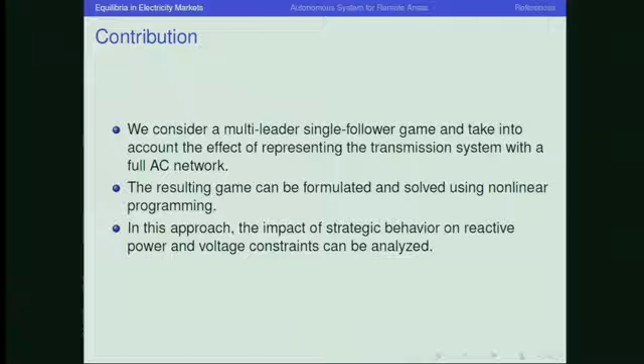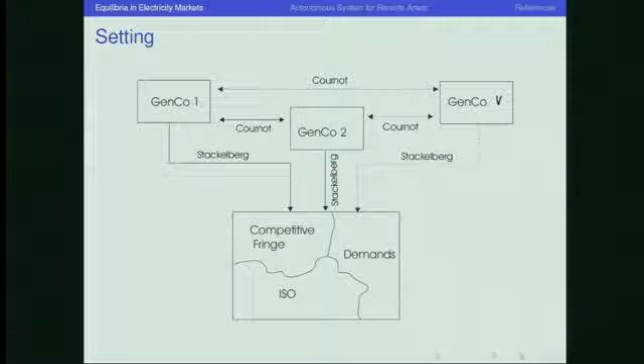Here's the idea of our market model. What we have here is a certain number of generating companies, or GenCos, that are competing against one another. But they are the ones that are deemed to be large enough that they have the potential to influence the market. So these are the guys that we want to keep an eye on from the point of view of the regulator, someone like the ISO. And then down here we have a follower. So these guys are the leaders of the game.

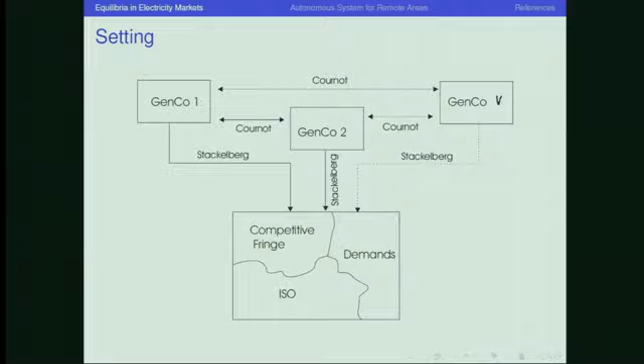And here we have a follower where we have the ISO that observes what's going on and clears the market. We have all the various demands in the market, which here are assumed to all be small enough that they won't actually game the market. And we have all the other suppliers that will simply take whatever price the market gives them. That's what we call the competitive fringe. So these guys we can basically all lump into one follower, and these large generators here are the ones whose decisions will impact the outcome.

I'm going to briefly show what the difference is between modeling with linear or nonlinear equations. So if we look at the DC approximation for the transmission system, we have a linear equation on the phase angles here. So theta is the unknown.

If we look at the detailed transmission system, we have two equations. We have this equation here, which is the detailed version of this one. So here we've basically said the cosine is small enough, and we approximate it with the angle. And the voltages are all approximately 1, so we simplify things and we get that. And then there's this other equation that completely disappears, which is the reactive power equation.

And we put some limits on the voltage. The price reacts to the demand. So if the price goes up, demand goes down. So we assume that the demand is price reactive. And we have some technical limitations on some reactive demand at every node for the stability of the system.

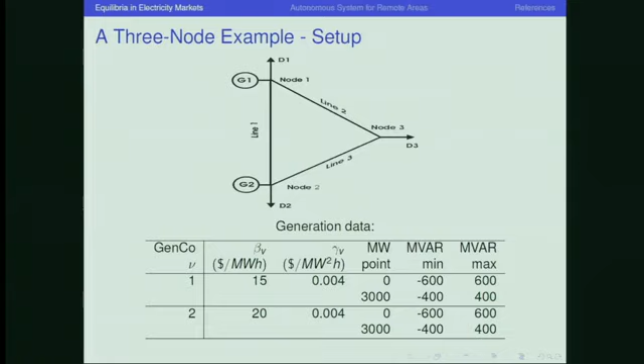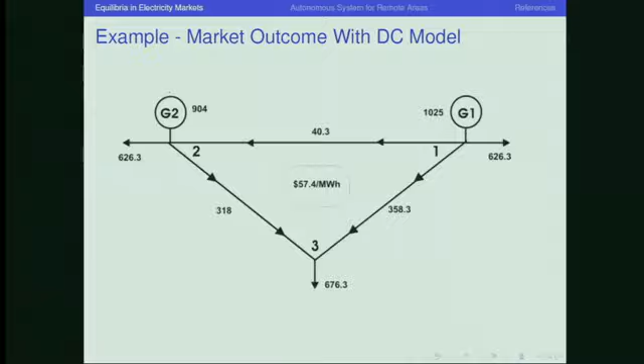And here's the outcome if I set up the large nonlinear optimization problem, which I didn't show because it takes a while to work through the whole problem. But we're basically looking at a bi-level optimization problem on that market. And here's the outcome if you solve the DC model. So we have generation amounts for G1 and G2. These are in megawatts.

And then we have power flows of 40 this way, 318 this way, and 358 this way. This is what's drawn by the demands of the 3 nodes. And one of the things you get with a DC model is that there's a single price for electricity for the whole network. And in this case, it's going to be $57 per megawatt hour for the energy.

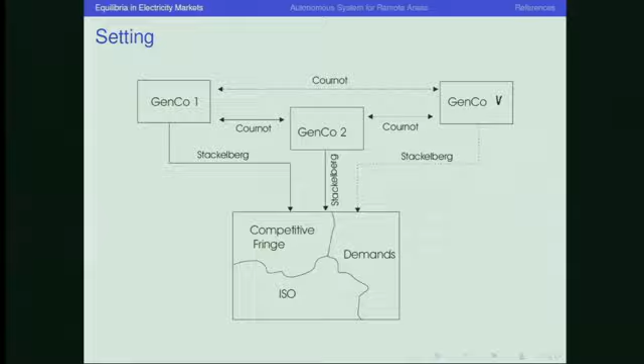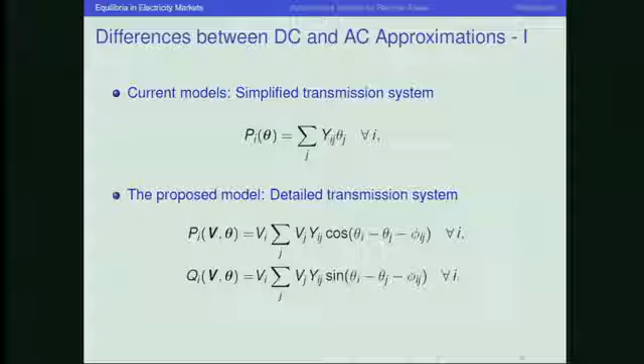So what I've done here is taken this problem and set up an optimization problem that says I want to maximize the profit for these guys, subject to having an equilibrium in the market with the followers here and their decisions as a leader. So it's a bi-level optimization problem. Write the optimality conditions. Make sure that the power flows all satisfy the simplified conditions at the top, this one, and this one. And you solve.

And then from the dual variables at each node, you get these prices. But in the linearized model, the dual variable is the same at every node. So you just get the same price no matter where you are in the network.

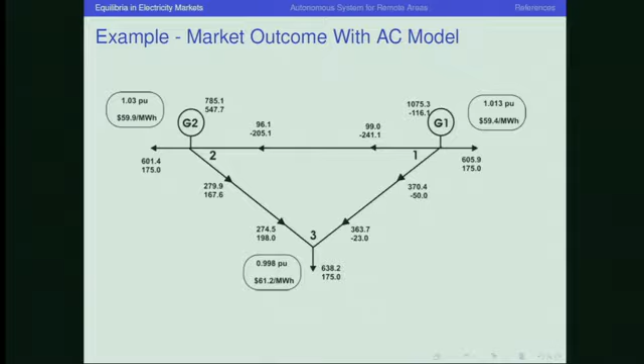Another aspect that also gets modeled is the losses. If you notice on each edge, instead of having a single number of megawatts, I actually have two numbers. I have active power on top and reactive power at the bottom, and there's a loss going from 1 to 2. So the amount injected is 99, but the amount that actually arrives at node 2 is 96. And this is much closer to the behavior of a real electricity network.

Another interesting aspect of this is that in the nonlinear model, in general, the equilibrium is not unique. So your market might land, instead of this solution, at this solution, where the prices have now changed. So here it's gone from 59 to 61. Here it's also gone up, and here it's also gone up. We still have the same general pattern that power is more expensive at node 3 than 1 or 2. But it is a different equilibrium that could be reached by the market.

And the power flows themselves are also going to be different. So for example, instead of having nearly 100 megawatts going from 1 to 2, I only have 67. And in fact, it's flowing from 2 to 1. So it's a very different solution in terms of that qualitative aspect of it. So the key difference really is how detailed do you make the description of the network, leaving all other assumptions the same for both the linear and the nonlinear model.

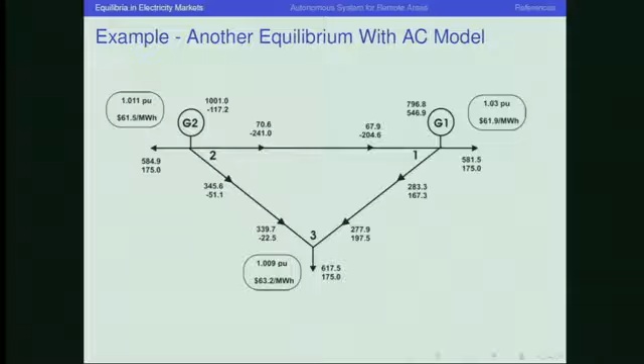One important point as well is that this approach is computationally effective. This is an example on 3 nodes. This runs fairly fast. But we have also run examples with much larger networks from the IEEE standard benchmarks for the purposes of publishing, and you can get these results in reasonable time. You can run a lot of simulations in a day to get a sense of what's going on. So this is computationally effective.

And then this can also be used for different kinds of equilibria. So the equilibrium that I discussed here, without getting into too much detail, is what's called a Nash equilibrium from what's called a Cournot-Stackelberg game. You can change the rules and apply the same principle to find different kinds of equilibria as well. So the point really is that it pays off to have the more complicated model for the network, and it can be solved using the tools that we now have from nonlinear optimization.

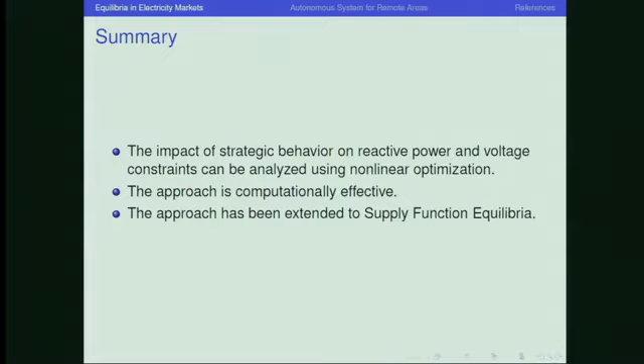Okay. So that's the first part that I wanted to mention. The second part that I want to mention is a different problem, which is the problem of designing a system to provide electricity in a remote area. Okay. And this is joint work, as I said, with our student Thibault Barbier and Gilles Savard from Polytechnique Montréal.

This is important in Quebec because we have a fair amount of activity that takes place in the north of the province. So we have the United States down here. North of the United States, there's a country called Canada. Within Canada, there's a province called Quebec, which is this red piece over here. And then far up in the north, of course, most of the population lives down here. Far up in the north, it looks like this. This is Newfoundland and Labrador here.

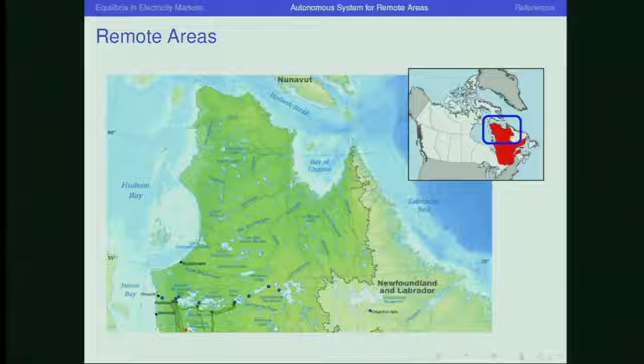And there's actually, for example, a mine at 62 degrees latitude, somewhere up here, called the Raglan mine, that exploits nickel. Okay. And if you wanted to connect the operations of the mine to the network, you'd have to draw a line from up here all the way to down where this water is. This is where there's a large chain of dams called the James Bay Complex that generates a very large amount of electricity. And that's nice, but it's a long way to go. So if you wanted to do this, it would get very expensive. And the idea is to have, of course, an autonomous system there to provide the power for the mine.

So the mine has an expected lifetime. So we want to plan what equipment do we place to provide the mine with power for this expected lifetime. Okay. Traditionally, what one would do is to put some generators, so there's some load to provide. We put some diesel generators, we figure out how many we need to put, and then we fly in, actually we boat in, because flying would be very expensive in this case, the fuel for the generators to provide the load.

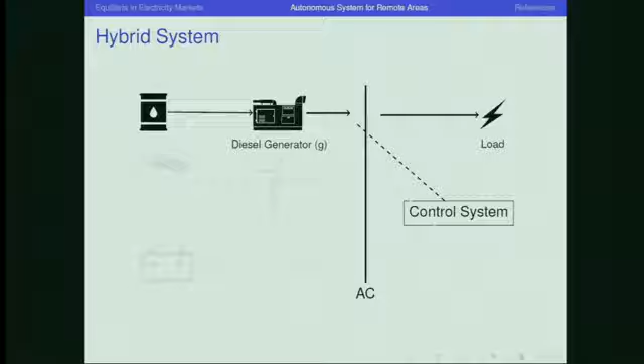A more recent approach is to say, well, maybe we can have wind generation as well. If it's a location where there's enough wind, we can think about putting up some wind turbines and using that to save on the cost of fuel for the generator. Okay. Now we have some decisions to make in terms of balancing these two, right? So we need some kind of control system that's going to be installed that's going to make decisions about how much to run the generators and how to operate the wind turbine as well. Okay. So this gets a little bit more complicated.

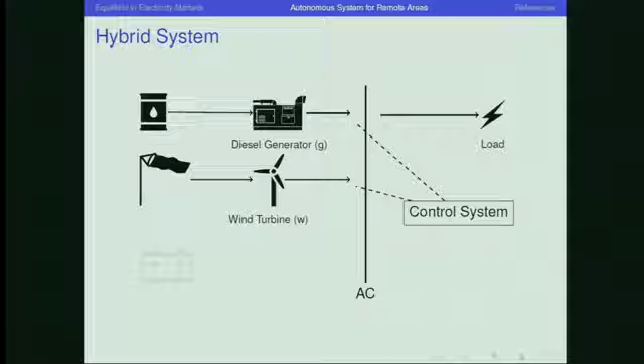The next ingredient is to actually take advantage of the fact that we now have reasonably good batteries that can be placed on site. And now there's this idea, conceptually, that if your wind at some point is enough to provide the demand and more, then we take the more and we put it in the battery. And when we don't have enough, instead of running the generator, we could draw from the battery to supply demand. The point is to try to save on fuel, because that's the expensive part on the ongoing basis. Okay? So now the control gets even more complicated. There's also the fact that here there's going to be loss from the battery, and there's going to be also some loss because there's a conversion from DC to AC that has to take place when you do this operation.

If we now take this idea and we say, okay, we want to design a system like this for one of these mines, well, we have to decide first how many of these generators, how many of these windmills and how many of these batteries do we put. This is a capital investment up front for the sake of operating the mine. So that's the first decision. The other part of the decision is we have to design this control system that actually operates them. And the objective there is to do it in such a way that we minimize the use of the generators and the cost of diesel. So there's two different optimizations going on, the upfront cost and the running cost for the years that the mine is going to be operating.

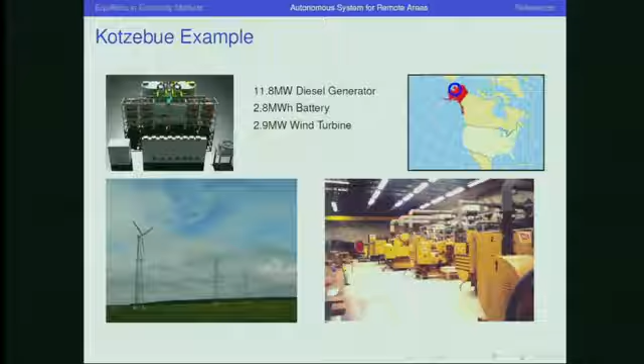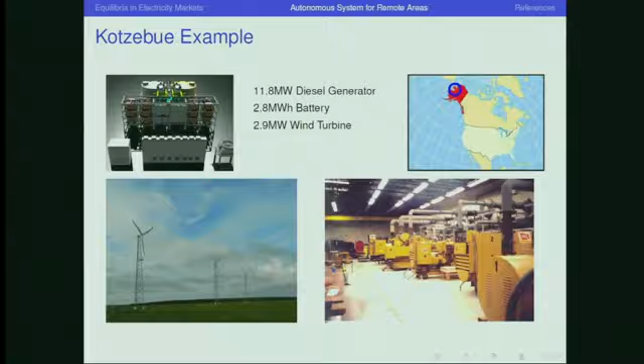There is actually such a setup in existence, at least one. There's an example in Alaska, in this place called Kotzebue, which has 11, almost 12 megawatts of diesel generation, a battery of almost 3 megawatt hours, and a wind turbine that can reach up to 3 megawatts of generation as well. Okay. So this is really done in practice. This is one such example.

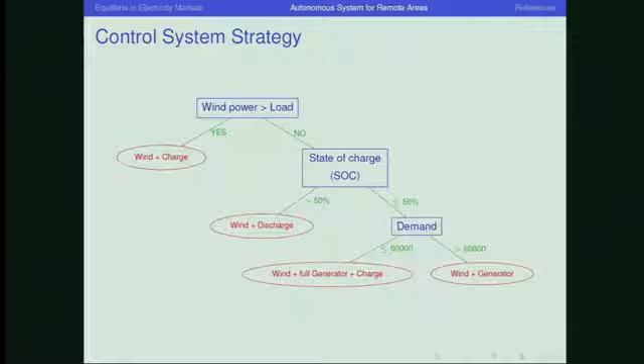And this is an example of how these control strategies work. So they'll say something like, is the wind power more than the load? If yes, then use the wind and charge the rest to the battery. If no, then I look at the state of charge of the battery.

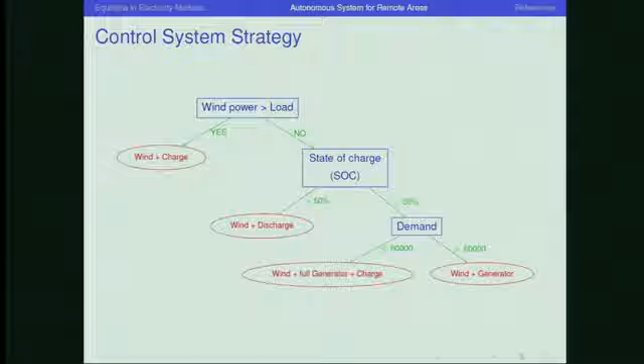If the battery is fairly high, more than 50%, I'm going to use wind and use the battery for the rest. If the battery is low, then I look at the actual demand. And depending on the level of demand, I either use wind plus the generator and charge the battery to increase this percentage. Or if the demand is really high, I have to forego recharging the battery and just put the generator towards demand. This is a simple example of such a control.

Okay. Miguel, does the control ever play with smoothing the demand? Because that's something you could... That's a good question. As far as this model is concerned, we didn't handle smoothing demand. We just assumed the demand is there, we have to supply it. But a next step would be to actually do what's called demand response, which is to manage demand to smooth the load. We haven't done that.

But in principle, you could do it because you've got full control. It's your mine, you're setting up the system. So that's a good point. We haven't put it in this model, but in principle, it could be done. Yeah. And then it would simplify some of these decisions, but it would complicate because now you've got to put the demand response decisions into here, right? And they might involve decisions about stopping operations, which might or might not satisfy the managers, but that's a different question. That's a good point. Yeah. So we're not doing that.

How often will the decision be revised or changed? This decision of how much equipment you put would be typically one and done. No, but the control. Oh, the control. The control is also usually one and done. So you set up the system and you design the control, which is hardwired into the system. Then you have to decide, dependent on the state of the system. How often is this decision made?

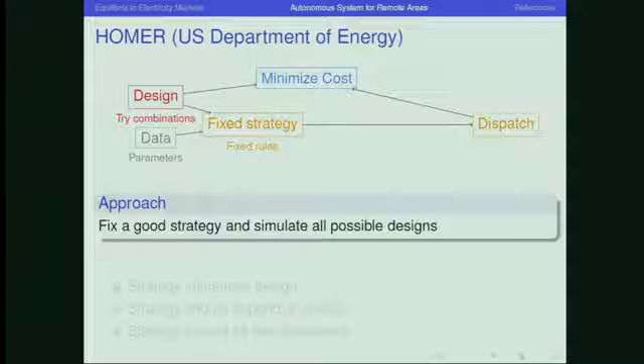There's a software that's been designed by the US Department of Energy to do this kind of analysis. It's a piece of software called Homer, and the way it works is that it fixes the strategy and then simulates all the possible designs. Okay. So it has decided what this strategy looks like. That's actually fixed. And now we decide, given this strategy, how do we make these decisions on the equipment?

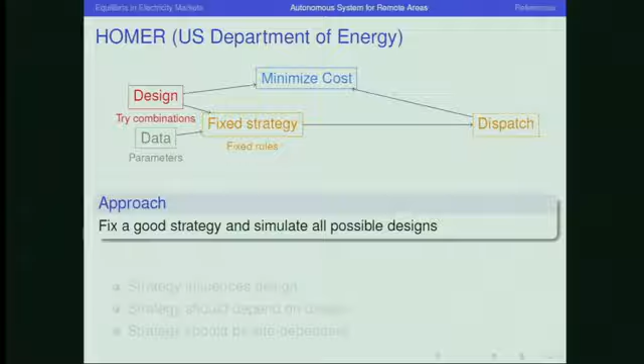Okay. And it just runs a lot of simulations based on demand forecasts and wind forecasts to figure out how much equipment one should buy. So from Homer's perspective, the strategy is fixed, and we just try a lot of design combinations for the equipment, given some data, and then we just pick the one that gives the minimum cost. Okay.

From our perspective, there are some limitations with this approach. One of them is that the strategy is influencing the design, which is not necessarily the way it should go, when in fact the strategy probably should depend on the design as well. You have to do the strategy depending on the resources you have. And the other aspect is that the strategy should be site dependent. Right? The amount of wind you get is going to vary from site to site. So why should the same strategy always be the right one, so to speak? Okay.

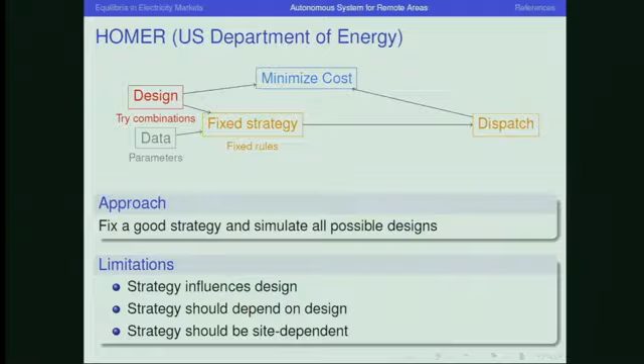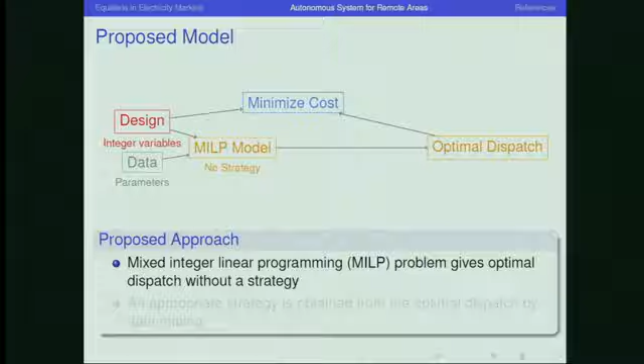So the proposed approach is different in that we do the following. We have no strategy. We set up a mixed integer linear optimization problem that's going to define both the design, so what equipment we install on the site, and the optimal dispatch. So given the forecast, it's going to have a strategy that, for every single hour of the forecasting period, tells you what the dispatch should be. So it's the ultimate strategy. It's extremely detailed for your current forecast.

Okay? So we really get an optimal dispatch without a strategy per se, but of course in practice we need a strategy, so from this optimal dispatch we can then apply data mining techniques and come up with a reasonable strategy that's actually implementable in practice.

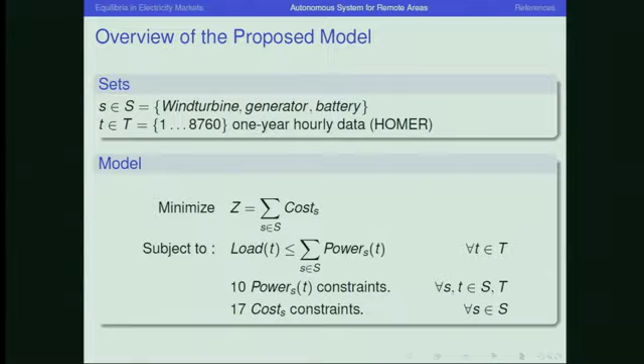So let me just quickly scan through the model. We have the sets of equipment and the hourly data. And what we want to do is minimize the cost of setting up the system. So this is the initial upfront cost. We want to make this as cheap as possible, subject to being able to provide the load and satisfying all the power constraints and the cost constraints, which you can imagine. There's nothing particularly mysterious. So with a particular scenario, we can run our model and we can run Homer.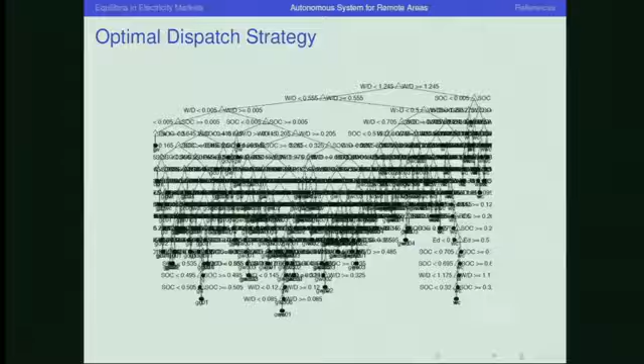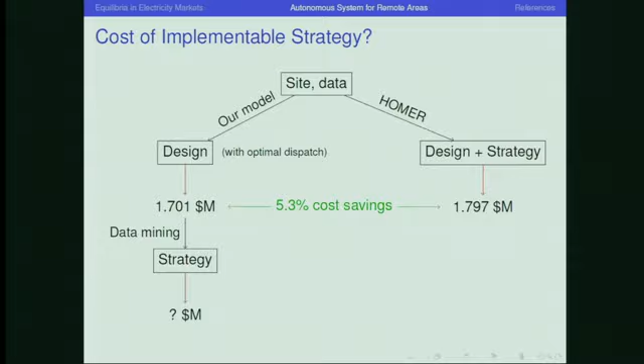And if you look at the dispatch strategy, this is what it looks like. So we have a very detailed strategy that takes into account a lot of small variations. So of course, this is not usable in practice. But what we can do now is look for a better strategy. Of course, the moment we have a simpler strategy, the cost is going to go up, because we're not going to be quite as refined. So the question is, can we still have a cost savings compared to the Homer approach?

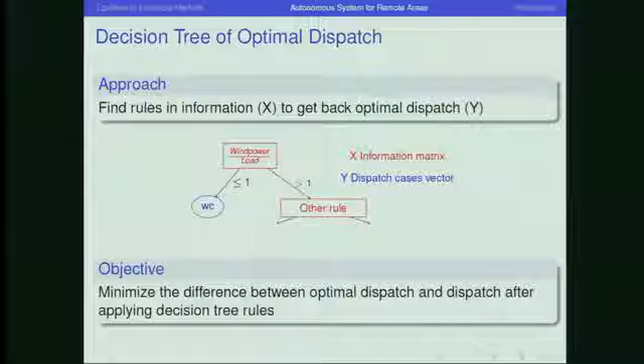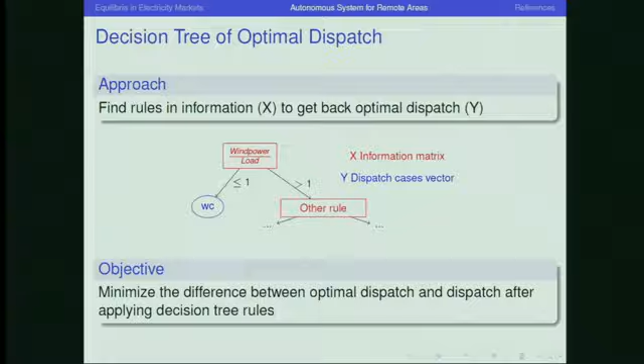Excuse me? Yes? Is the strategy more complex than in the Homer case? Yes, I believe so. Could you have the same constraint as in the Homer case and have a saving? If we put the same strategy as the Homer case, in principle, we reproduce this. Not the same strategy, but the same number of decisions. The same number of branches in your tree. Sorry, what's the question? So in your Homer strategy, you have, I guess, a number of decisions at each level.

Right. So if you count the number of decisions, the size of the tree. Yeah, basically. I'm not sure off the top of my head. I would have to check. Because this would be the right thing to compare, right? In terms of the actual implementation. That's a good point. I don't know off the top of my head. I know it's different, but I can't tell you immediately how different it is by that measure. That's a good point.

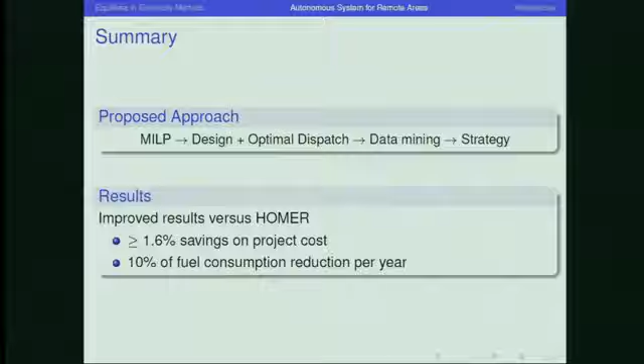With respect to Homer, in this particular scenario that I showed, as I said, we get a savings of at least 1.6% and also 10% of fuel consumption reduction per year. So it's a significant cost as well when you've got to get fuel to these remote places.

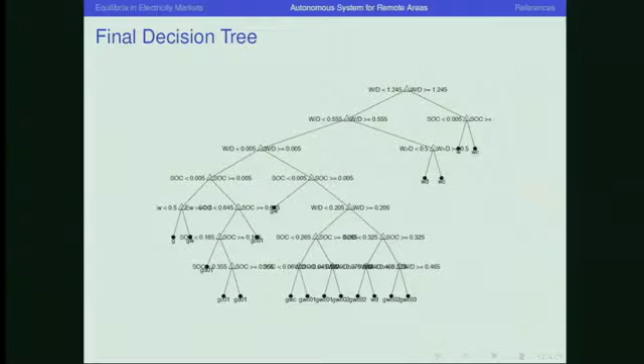Don't you consider unit commitment constraints where maybe you don't want to use all the wind power even if you can? Yes. Well, basically, this is like a unit commitment, right? It's a very simple unit commitment problem. You've got these resources, and you manage them, and you have to decide which way it goes. So in a sense, this is the answer to the unit commitment. Okay, but when we have the wind power, you use it all. Not necessarily. It depends on how these decisions go, right?

You may find it more economical, if your generator's not running and your battery is full and you have enough wind for the load, then you just supply the load and basically dispose of the remaining wind because there's nothing else you can do with it. So you can't do wind commitment in that sense because you're isolated, right? You have nowhere else to send the extra energy. It's probably an unlikely scenario, but in that sense, it's like a mini unit commitment. So I'm not convinced that thinking about it as a unit commitment necessarily makes sense. But we can talk more about that.

It would make more sense to think about it as unit commitment if there were some strict operational constraints. For instance, in thermal generation, you have to put the turbine on for a certain amount of time, or keep it off for a certain amount of time. Whereas with the diesel generators and wind, you very likely have relatively few of such operational constraints, and you can really put things on and off at will. But there's a price to put it on and off, so maybe it compensates to save the wind on the battery. Not so much in this case.

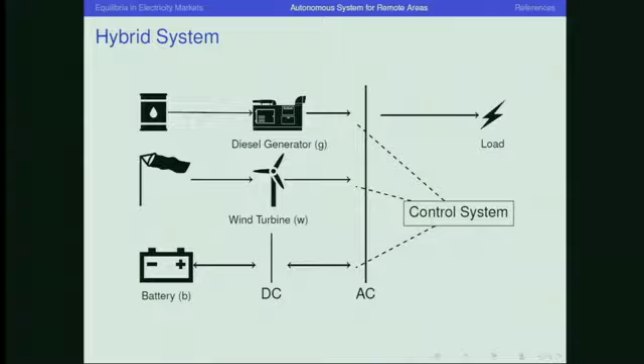We basically assume that these guys more or less turn on and off at will. Maybe there is some cost, but it's not the same as, as Jakob was saying, with some thermal generation where you really have constraints on turning on and off. Or the ultimate one would be something like a nuclear plant where you're stuck. You have to operate at this level, and you have to make do with it.